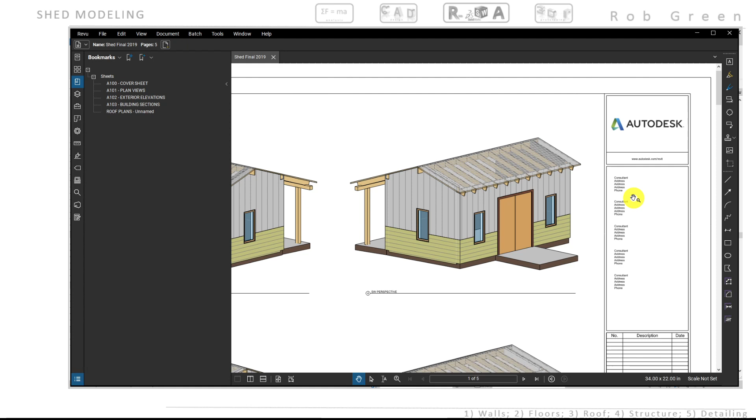Welcome everyone. We are ready to begin with putting some walls into our shed project.

And if we zoom in a little bit to this kind of finished view that's sitting on Bluebeam, we can see that we're going to need a couple different wall types. One is we need a wall type that's going to have some horizontal siding on it, and we're going to need a wall type that has some vertical siding on it.

And in addition to that, we're going to use a different technique, or let's call it an alternate technique, to build this shed. And it has some advantages where the wall types get somewhat complicated. And so I just want to introduce this as an option for you guys. So let's go ahead and get started.

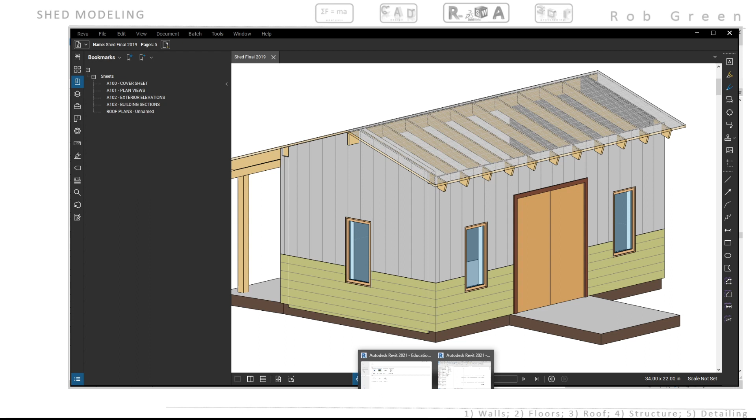We are going to need 3 different types of walls. What we're going to focus on first is the wall that's going to be considered the framing wall. So I'm going to navigate to my first floor finish, and I'm going to close out some of these other views. Again, just kind of keeping track of my tabs up here to stay organized.

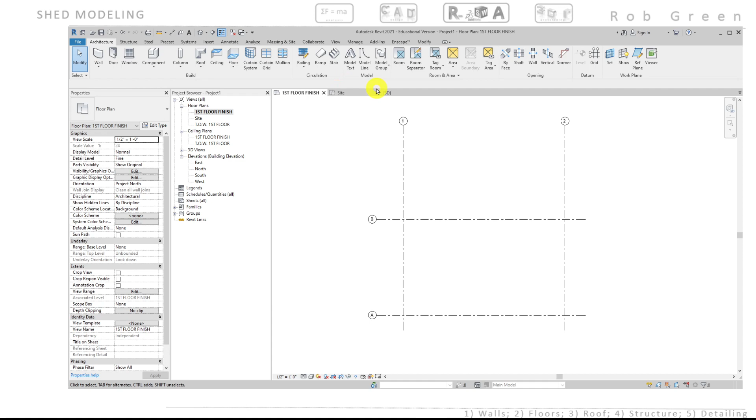So if I need to build a wall, I need to go to the wall command, and I have this basic generic 8-inch wall, and I'm going to duplicate that thing. So edit type, and once I have my dialog box readable, I'm going to duplicate this thing, and I'm going to use a 2x4 framing wall. So that's what I'm going to call it.

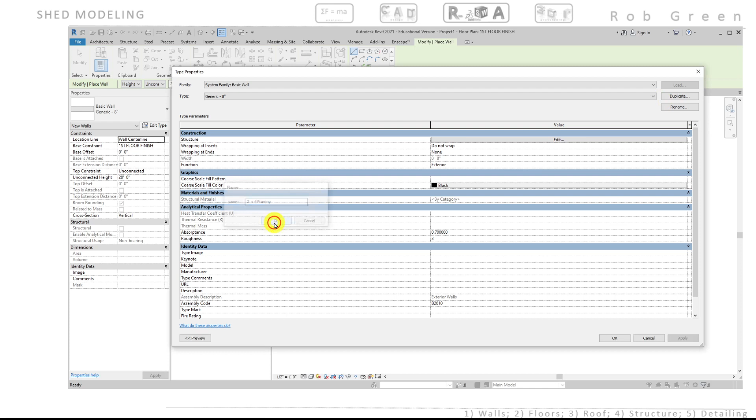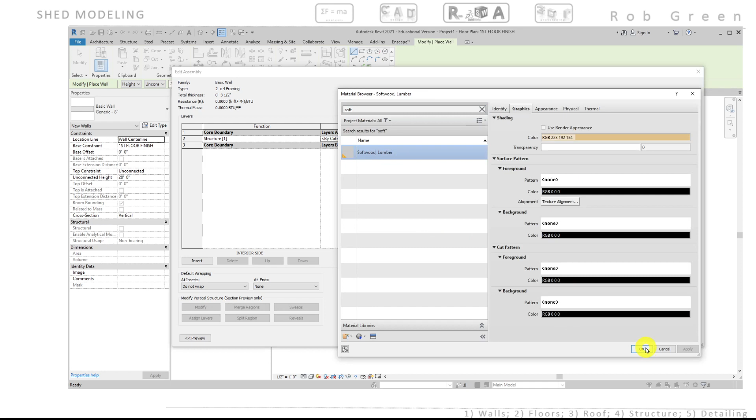So once I have that name, I'm going to edit the structure, and I certainly don't want it to be 8 inches. I'm going to be framing this shed with 2x4s, so I'm going to use 3.5 inches as the width, and I'm going to select a material, and my material is going to be, I believe, softwood lumber. So I just typed in SOFT, and softwood lumber comes up. I'm okay with all of the graphics options here, and I'll click OK, click OK, click OK, and I'm back into my drawing a wall command.

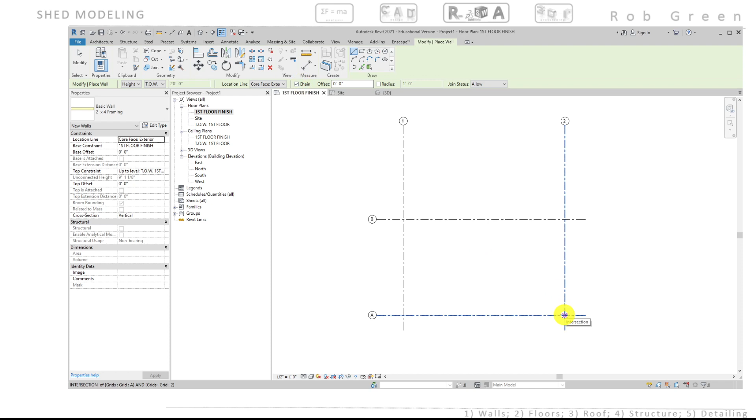So I have my basic wall, it's 2x4 framing. I don't want it unconnected. I want it to go up to top of the first floor wall, and its base constraint is the first floor finish. I want to draw to the core face exterior, and no offset is fine, and I want to continue to chain. So as I finish drawing one wall, I'm ready to draw the next. So all I need to do here is select the intersection of my grids, going around in a rectangle, and I have that wall complete.

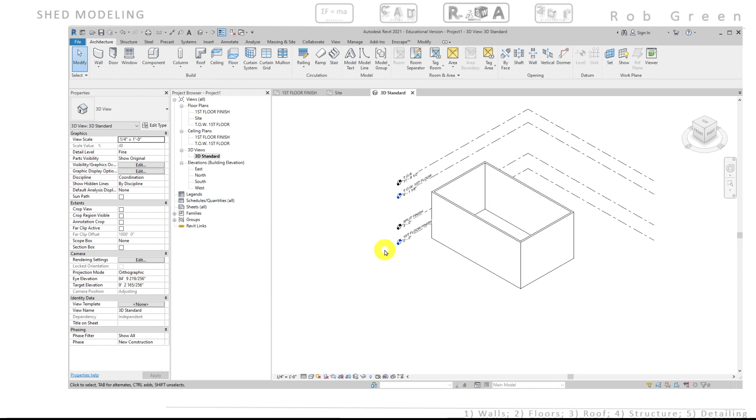I'll navigate to 3D, set my view resolution to fine, 1/4 inch equals a foot, and I am going to name this thing, so that each time I go to a 3D view, I can go back to this 3D view, and the changes that I make stick. So I'm going to call this thing 3D standard. Okay.

So if I choose realistic, looks like I have wood walls going all the way around. So just let's be clear that this is only the 2x4 framing. So in reality, the only thing that should be here is studs on 16-inch centers with a sill plate and 2 top plates. However, this is the way Revit represents this graphically. Okay, so back to first floor.

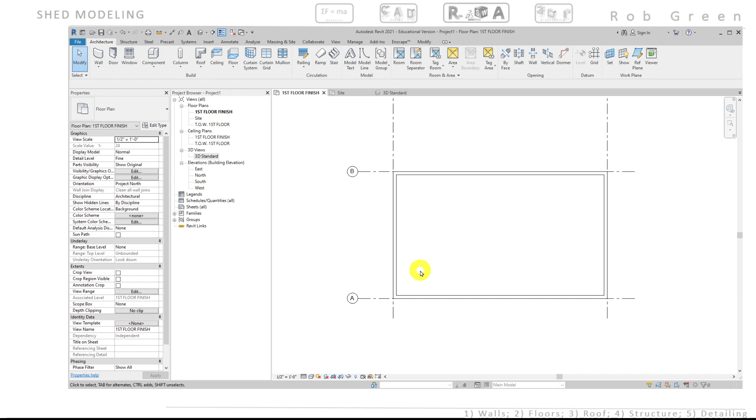So at this point in these videos, I think what we're going to do is jump right off and put some doors and windows in here. And only once all those doors and windows are in are we going to come back and put what are called the finish walls that go on the outside of this framing. Okay, so let's do that.

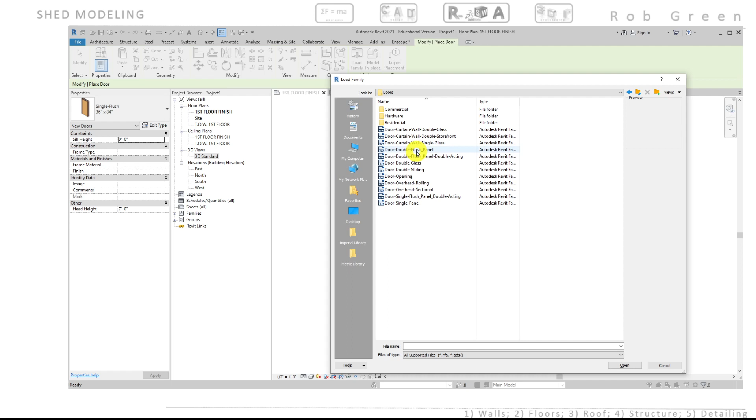I'm going to put in a door, and I'm looking for a 72 by 84 door. So if I look down here, I see double flush panels. Right, so basically blank wood panel doors seem relatively inexpensive for a shed, so I'll choose that option. And we want 72 by 84. Click OK, and I am ready to place this somewhere on my wall.

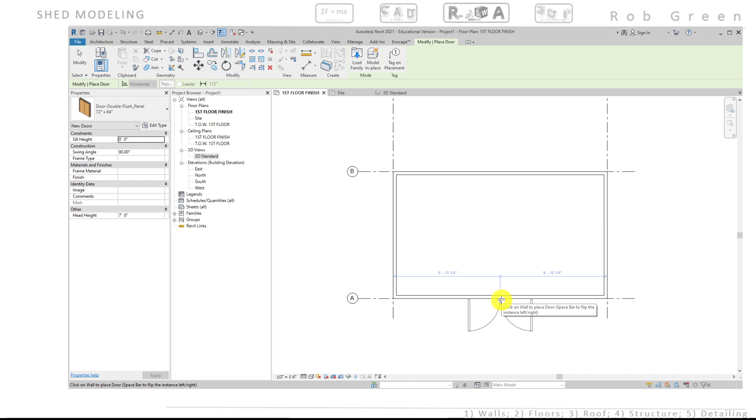I'd like it centered in the wall. It's really easy to find that center. Revit loves to snap to the center of the wall. I'll go ahead and click that into place. And notice, of course, when I do, the door cuts the wall away, and I can see what that looks like in 3D. There's my door cutting through the wall.

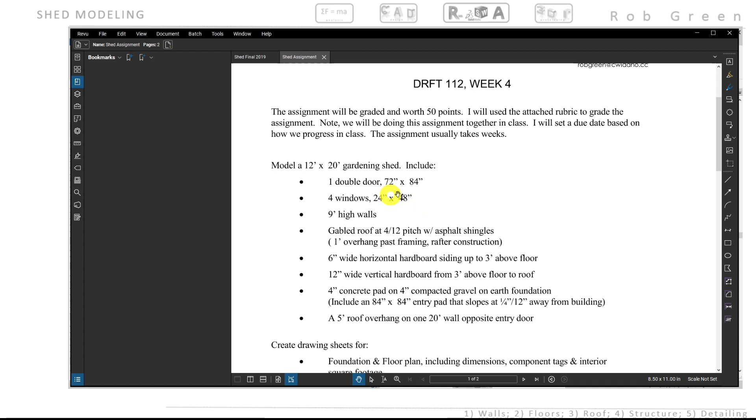Okay, so I also am going to place some windows in here. So back to first floor finish, and I am going to check real quick, pause this, and see what size windows I want to use. So I brought up the assignment sheet, and basically we're asking for at least 4 windows, 24 inches wide by 48 inches high. Feel free to use windows of either different size or fixed or double hung. Feel free to be creative, but I'm going to use these 24 by 48s.

So I'm going to use my window command, and I have the fixed window in here, and 24 by 48 is an option. So I'm going to place a couple on the front wall, and a couple on the back wall. Notice on these side walls, Revit gives me a great opportunity to center these windows on the walls left and right.

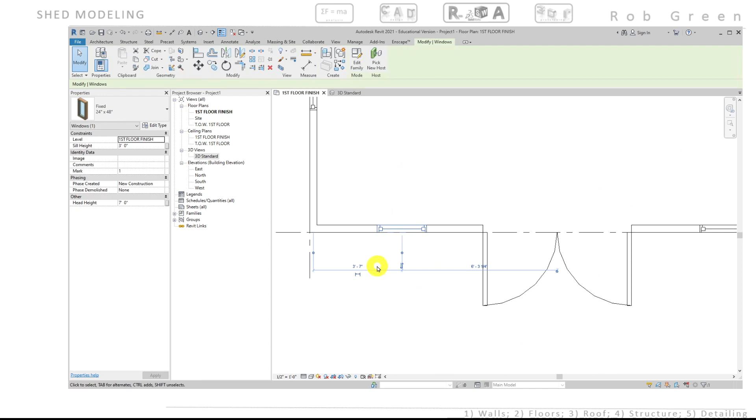I don't know if you noticed, but when I placed my windows here on the front wall, I really didn't pay attention because Revit's centering grip is trying to use the center of the door as one of my options. I'd like to have my window centered in the exterior view of this wall, so that architecturally from the outside these windows are centered on that wall.

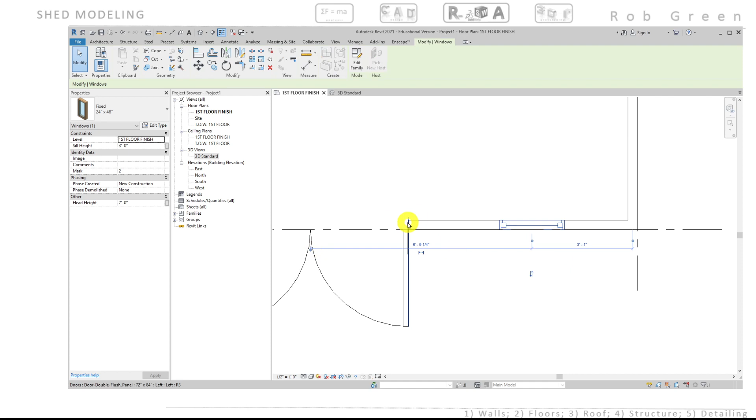I'm going to do that by moving my reference grips, and then when I have that in here, I can shift this a little bit, and I get Revit's really nice simple centering option. I'll select this wall, do the same thing, adjust my reference dimensions, and then adjust the windows so that it's centered.

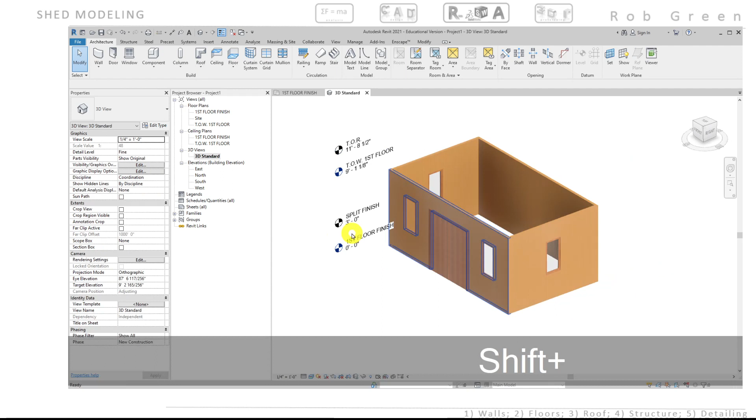Okay, so I have 4 windows. They're all centered up. I look at this thing in 3D. Everything looks okay from here. And I think, again, we're just going to leave this shed with no exterior walls at this point, or finish walls.

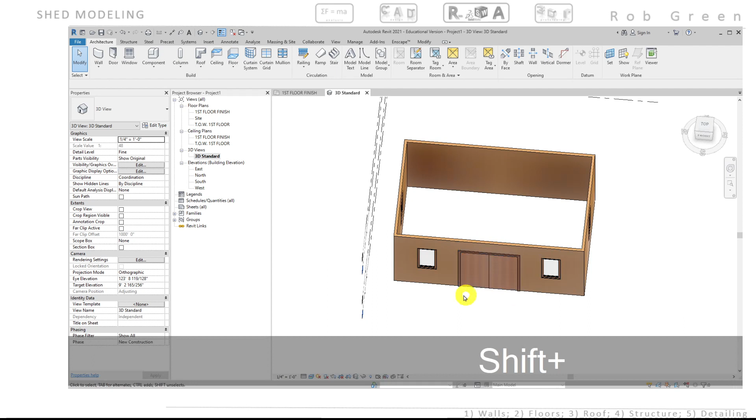And in the next session, we're going to come back and start to put in the floors underneath. We're going to have a concrete floor that sits underneath the walls, which also serves as the foundation and floor. And then we're going to have a landing pad that comes out from the front, and a landing pad or storage area back behind our shed, and it'll all be concrete. We'll come back in the next session of videos and put that together.